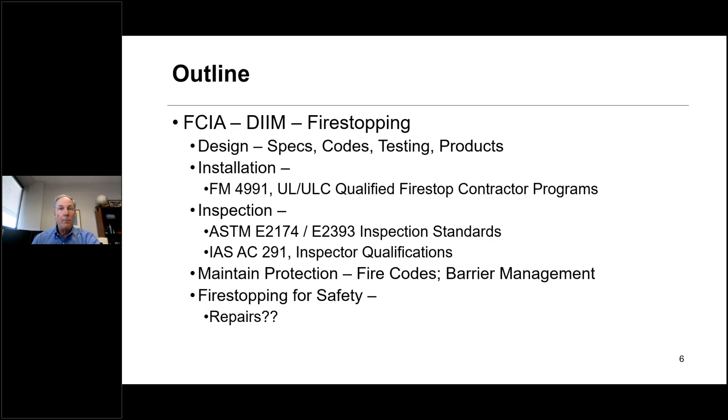A big deal. And then maintaining protection, which is what we're going to start with today. So the DIIM, it goes in a circle. I've had this circle slide for probably 15 to 18 years, and I think it's great. Why? Because it comes from the quality management process thinking.

Quality management process really evolved from a guy named W. Edwards Deming, a management consultant from just after World War II, who said to focus on the process rather than the people. If something's not being built right, don't go beat the people up. Check the process first to see if the process is set up so that the people can win. And if there are still problems with the people, train them to fix the problems that currently exist in that process. Deming is who came up with that program. And each one of these pieces, DII and then barrier management, has been customized to our industry.

Specifications, codes, standards, management system programs for contractors. The manufacturers have their own management systems, education, inspection in Chapter 17 of the International Building Code, NFPA 80, NFPA 1, barrier management. There's all kinds of things we've customized to make this quality management circle work.

So at the end of the day, the firestop materials that have been installed to the manufacturer's installation instructions and the listings work as called upon by fire.

So let's flip this program upside down a little bit, and I'm going to take us to the end of the program and work our way backwards, then come back forward and talk about the end of things.

End meaning when the building has already been built and it's constructed, the building codes have been followed, the ASTM E2174 inspection found the firestopping to be excellent. Then the building is turned over to the building owner and manager. And then what happens? Well, we all know what happens.

Changes are made above the ceilings where the fire barriers, smoke barriers, firewalls might exist, or even where the smoke partitions are when there's no ceiling in place that would allow the building owner to not continue the walls up to the ceiling assembly, floor ceiling assembly above. That means changes take place all the time.

How do we keep track of all the changes that take place in a building when really the building owner is focused on how's the carpet look, is the glass clean, is the lawn mowed, does the roof leak, does the parking lot have holes in it, does the sprinkler system work because the fire marshal's all over me, does the alarm system work because again the fire marshal that comes around yearly is going to ask me about it. What about the compartmentation?

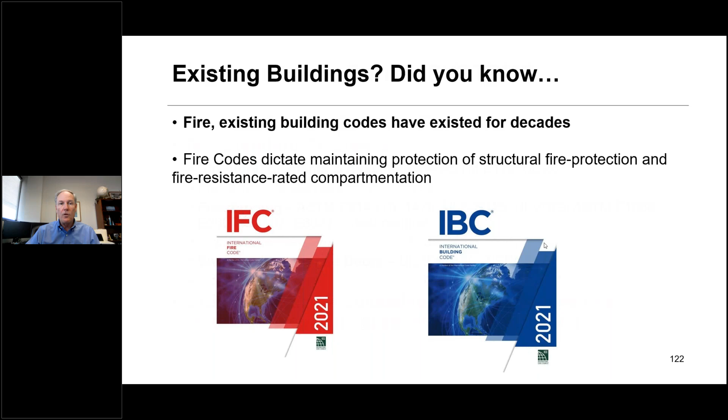We're just going to cover the testing a little bit. It's complex, and you need to talk to the building owner about how complex it might be. But just know, if you're a building owner or manager on this webinar, here's the requirements in the fire code that require maintaining protection. And it's in many, many places. I'm just going to focus on three: NFPA 101, NFPA 1, and the International Fire Code.

These are North American standards and codes, and you'll find them used in South America. You'll find them in Mexico. You'll find them in Canada. Certain provinces in Canada use NFPA 101. Certain states and areas in Mexico use pieces of the International Building Code, Fire Code, Energy Code, and NFPA 1 might be used in various places too.

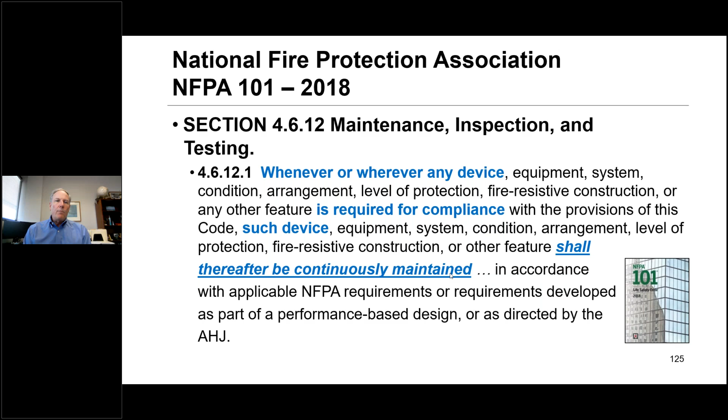Here's what it says in NFPA 101 about maintaining protection. It calls out right here: fire resistive construction continuously maintained. Why do I bring this up? Let me get through the rest of it. I'll tell you why after a bit.

Litigious societies exist. The US has plenty of lawyers, we graduate lots of them all the time. Canada is a little more selective, but you've got attorneys everywhere. And you've got liability, but more importantly, the way word travels today—bad news, that is—through the internet, through Twitter, through Facebook, through Instagram, through, pick any of them, TikTok, whatever.

The way things fly around the internet today, it takes a minute for bad news to travel. And we don't want bad news to travel about effective compartmentation. We want the good news to travel, that the silent policeman did its job and the fire didn't spread.

Moving on, look at NFPA 101, section 4.6.12.5, this is the general section. So the occupancy chapters would have to adopt this in order for it to be mandated as part of NFPA 101.

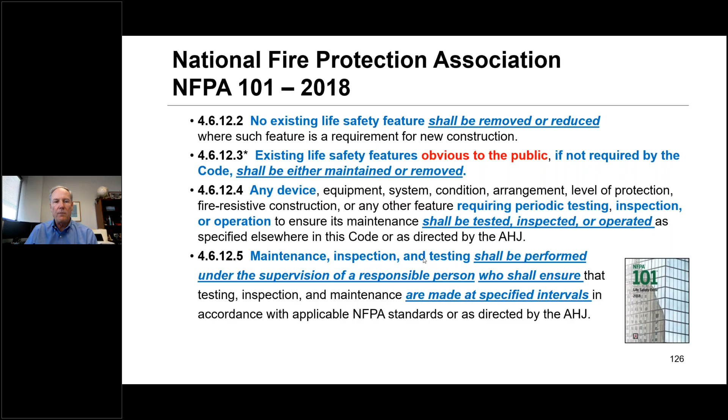But from a legal perspective and from the press perspective, if somebody has loss of life or loss of property, they're looking at what kind of regulations are there. It's very clear right here in the codes what the regulations are for maintaining protection of existing buildings with fire resistance in it. It even says that the person that looks at it has got to be responsible, ensures the testing, inspection, and maintenance takes place at certain intervals. And NFPA 1 comes out loudly and says fire resistant construction shall be maintained and properly repaired, restored, replaced where damaged, altered, breached, penetrated, removed, or improperly installed.

I spoke through it fast, but you're going to see it again because this comes up in one other document, the International Fire Code, almost the exact same language. This is really amazing stuff here.

From our perspective, we would like our membership, contractors, consultants, manufacturers, to show this to their building owner clients because it's a risk they might not know about. And that risk is pretty personal, because unlike a roof leak, which doesn't really kill people, fire spread and smoke spread could. That's why it's so important we look at this and think about how companies like yours as a firestop contractor, consultant, architectural design agency, or engineering firm can provide value to customers already using you for other things.

By focusing not just on firestopping, but on everything related to fire resistive requirements. That includes fire dampers, fire doors, fire stopping, the fire rated wall assembly, and take a look, even the roof assembly. Why is the roof covering mentioned?

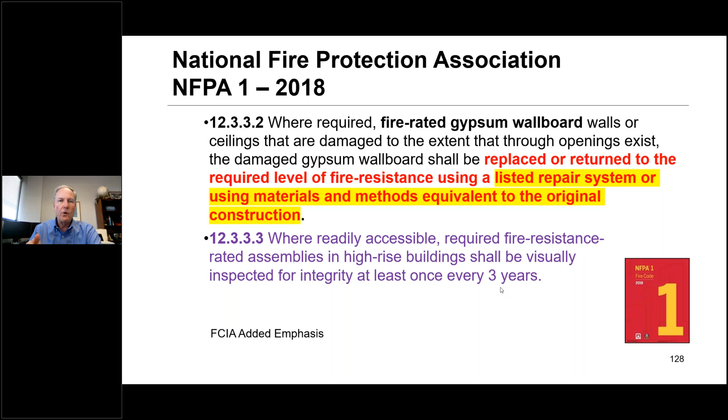So fire codes are pretty strong. They talk about how often, NFPA 1 says take a look at things every 3 years. So there's a trigger here that you, the professional, can bring to your building owner friend and say every 3 years you should be doing this. Whether they use their own personnel or a contractor isn't up to us, the FCIA. We just want to make sure it gets done so that the fire resistance is reliable and works when called upon by fire.

Look at NFPA 1 even more. It says that the person that's responsible—remember at NFPA 101 we saw a responsible person—this one says the responsible person's got to have technical knowledge and experience in fire resistance rated design and construction. How do you get it?

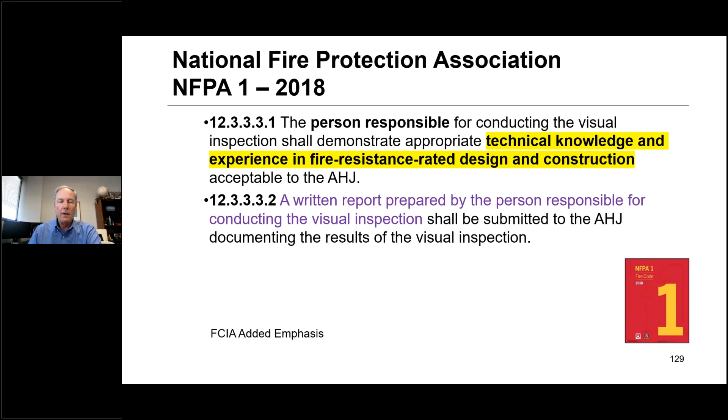The FCIA built the Barrier Management Symposiums. We built our Firestop Certificate of Achievement and education program, where you get a certificate for taking exams on firestopping just for this purpose. So you can prove that you're a responsible person because you've passed exams. The UL Firestop exam, the FM Firestop exam also can do that, as well as many other exams and education programs that might be out there too.

The International Fire Code screams just as loud. We're talking about the M, maintaining protection—the International Fire Code is about maintaining protection. That's the ICC family of codes. We just debated the 2024 version of that. The committee action hearings, final action hearings again in Pittsburgh sometime in October.

We've got some more discussions going on, not much going on right this moment. The big change came, and Rich was chair of the task group that helped make this possible: the International Fire Code is now broken into sections covering fire stopping, fire dampers, structural fire resistance, and fire rated glazing all in separate places, because each of them are separate disciplines. The NFPA codes don't do that yet. We'll have to see what happens with that as time evolves.

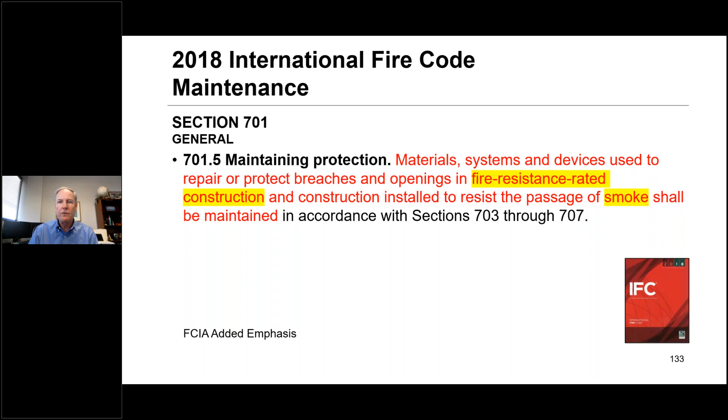So here's what the program looks like. It's 5 different areas to look at, and then of course smoke barriers, smoke partitions, maintaining protections is important. Take a look at this. Here's the language that was in NFPA 1.

Visually inspected by the owner, this time annually, and it's not just limited to high-rise assemblies or high-rise occupancies. That high-rise occupancy every 3 years is what you saw in NFPA 1. High-rise is defined as 75 feet above the lowest fire department access, 75-foot occupied floor, and for us, occupied roof above lowest fire department access. That occupied roof hopefully comes through for the 2024 code, not quite as clear as in the 2021 code.

So properly repaired, restored, replaced where damaged, altered, breached, or penetrated. If I were to look at this sentence though, it doesn't say that the repairs have to take place every year or every 3 years. It says that the repairs need to be handled as you go. In other words, as new services are run above ceilings, breaching smoke barriers or fire partitions, that protection needs to be maintained. Or if somebody punches a hole in a fire resistance rated assembly that's visible, that's got to be fixed and repaired with a patch that's fire resistance rated as well. All amazing types of things here that need to be taken care of.

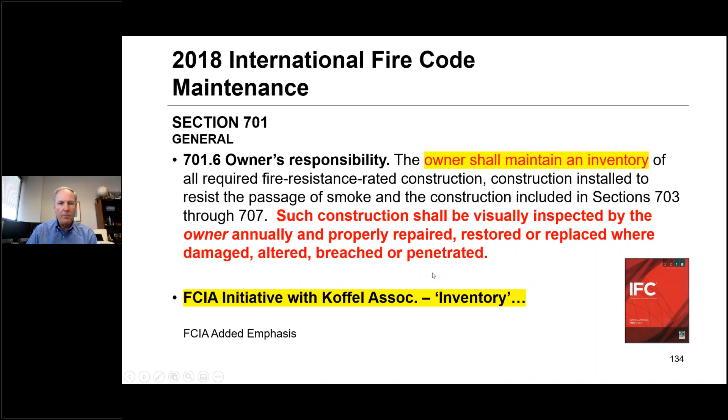It also says records shall be maintained so the building owner or manager can prove to the fire official they've done these things. And then there's one more term in here we want to talk about: the concept of an inventory of all required fire resistance rated and smoke resistant construction. What's an inventory that needs to get maintained? Well, unless we know what we have to maintain, what are these things? We don't know what to do and what kind of schedule to put them on.

You saw that there's an annual visual inspection in the International Fire Code. NFPA 1 has a 3-year review of the fire resistance rated assemblies, the construction, and the roofs. So what that does is trigger the building owner and manager in their procedures to have a review of these assemblies that matches up to what the requirement is in the fire code, so that when the fire marshal walks in and says, show me your records that tell me you did your 3-year inspection or your annual visual inspection, you've got that documentation.

The inventory would be, okay, Mr. and Miss Fire Marshal, we have either a software program on this laptop or on our tablet or on our phone, and here are the fire resistance rated doors from, pick a manufacturer. Here's the listing that goes with it. The glazing is found in the fire resistance rated assemblies. We pulled this from the UL Product IQ, and we've got it permanently on file. Why? Because things change. Manufacturers don't delist things, but they might not pay for the follow-up service and might not be listed in the directory anymore. So it's important the building owner and manager keep their own records of what they have so that they know they can prove to the fire official that these are fire resistance rated assemblies.

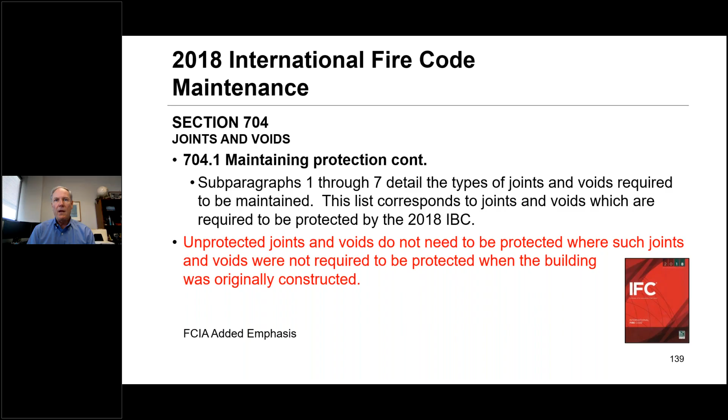That, along with the life safety drawings, gets you the inventory of fire resistance that we mentioned. That was something that was put into the 2018 version of the International Fire Code. It's in the 2021 version, and it's going to be in the 2024 version.

So if you're a contractor, educate your building owner and manager friends. If you have other divisions in waterproofing, insulation, or fireproofing, and you've got relationships with the building owner and manager, talk to them about what I just went through with you.

Use those slides, take them through to the FCIA website and you can click on the slides and see it. Or if you want to, just turn on the recording, because the members can get to the recordings, and just let this program present to them.

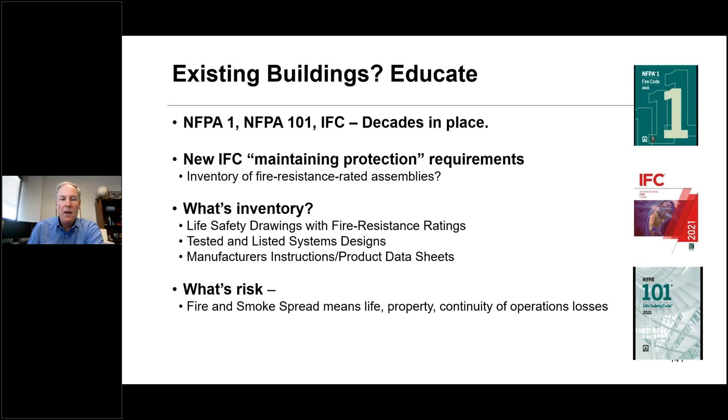Just know that the international fire codes out there, NFPA 1 and 101, all of them have been out for decades with maintaining protection required. That inventory has to be maintained, and we're trying to reduce the risk of fire spreading in buildings and increase the reliability of the installed systems, so that we wind up being the success story in the press that we stopped fire from spreading from place to place.

If you have experience with that and have seen where the fire stopping, the doors, the dampers have stopped fire, and you've got pictures, send them to us. We want to find a way to use our platforms from the FCIA to promote the effectiveness of effective compartmentation.

Certainly we might have to talk to legal people, have to talk to the building owner, make sure that we can use these stories. But the more stories we can get from you, the better we can promote that out to the industry. Where there's fire resistance used, it's used most in hospitals, nursing homes, and prisons.

That's where you find a lot of compartmentation - apartments, condominiums, universities, laboratories, warehousing, manufacturing. Those are the building types. So who do you call on to find these people?

Hospitals and universities tend to call that person the physical plant manager. They manage all of the physical plant. The healthcare facility director, ASHE member - American Society for Healthcare Engineering - and all the local chapters, they have a big job. They keep track of a lot of stuff, including equipment that moves through that hospital as well. They have responsibility for that. You imagine how much they got to keep track of with their staffs as well. A lot to do there.

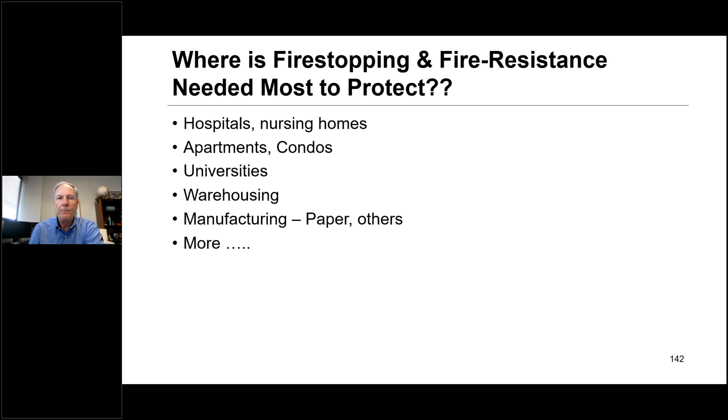So: life safety drawings, the tested and listed systems, the manufacturer's instructions - keep track of them, either paper, spreadsheet, or software. And think about becoming a barrier management services professional. The FCIA has a section, the barrier management services section, and that's where you get found. Those are the types of activities - inspecting fire doors.

NFPA 80 says do it every year - annual visual inspection of fire doors. Do they open, close, and latch? Is the hardware still there? Did somebody put screws where they shouldn't be? Is there too much paper plastered all over the door?

Fire-rated fire dampers - have they been tested? Is it now using remote testing? Somebody still has to flip the switch to make sure that the damper opens and closes as it's supposed to when it's activated. And then also the visual inspection of the wall and the horizontal assembly for breaches in those assemblies - that has to be done.

The building owner or manager has to do it either annually or every 3 years. Whatever it is, somebody's got to do it and somebody's got to track it. If you're not in that business yet, think about getting trained, getting educated, and getting into it. The FCIA has resources to help you with all of the above.

So let's go back to the beginning and get a few slides before we turn it over to our friend Rich Walke. This is where I was.

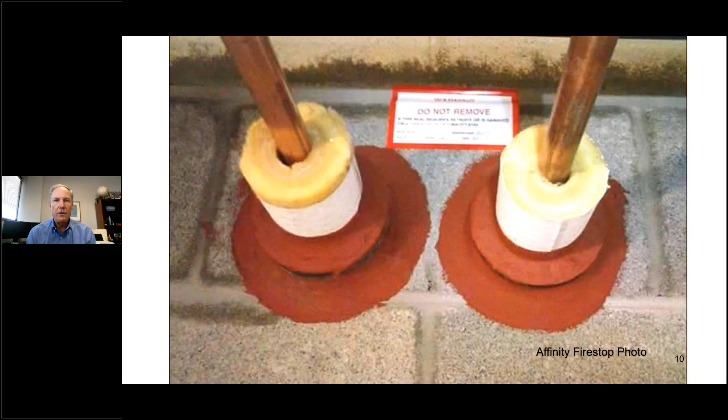And then Rich gave us this photo - or didn't give us this photo, but we took this photo. Rich and I have been using this for education, and we ask ourselves, which number is it? Is it CAJ 5138, 5209, or 5091?

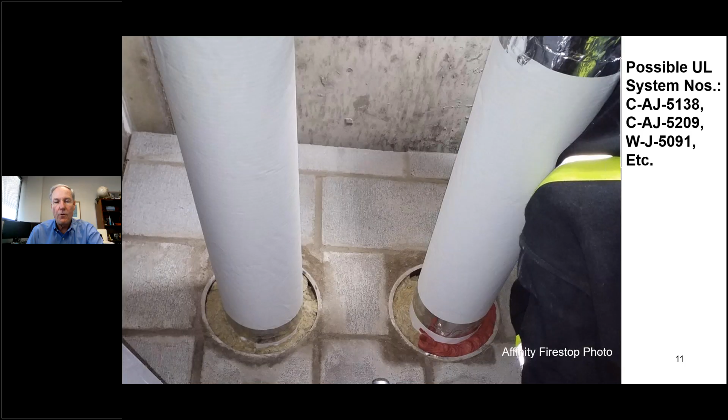Whatever it is, it's going to have requirements for the sleeves, for the depth and thickness of mineral wool, sometimes the direction and orientation of the mineral wool, the type of sleeve, type of insulation. All of that's going to be in the tested and listed system.

Before we get to the tested and listed system, Rich has to tell us about those tested and listed systems. I'll tell you that this is what gets put into the specifications. They talk about systems in part 1 of the specifications and the product properties of those products that are being used, that they match what the conditions are that are expected to occur in the field.

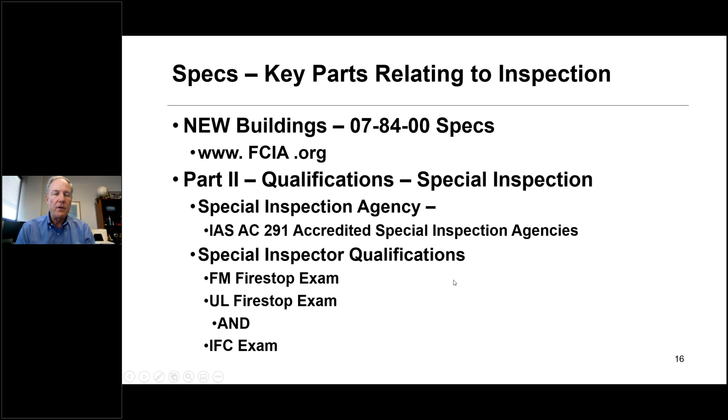Contractor requirements, I talked about those already. There's inspection requirements. The inspectors, we believe, should be educated and also pass the UL, the FM, and the IFC exam, because we believe those are important exams to pass. And then special inspection occurs.

When it comes to the life cycle of the building, Division 1 is hugely important. We did a program for the Construction Specifications Institute, CSI, and Construction Specifications Canada, and I can tell you the architects and specifiers had their note pens out, writing or typing notes when we brought this slide up.

In the audience when we presented this was Dennis Hall. Dennis Hall speaks at the FCIA conferences, and he'll speak at one of ours here soon. What he did was take the numbering system you see on the left, 6 digits, from 5 to 6, and he reorganized the master format. It was a big program. The book Who Moved My Cheese and all that kind of stuff took place during that same time. And our buddy Dennis moved everybody's cheese.

So I asked, hey man, what about this 01 78 39 project record documents? Is this where all the fire resistance has to be kept, so the general contractor has a direction from the specification to provide all the systems and manufacturer's installation instructions back to the building owner and manager? Is this where this all takes place? And he said, yep. This is where the direction comes to the general contractor to gather tested and listed systems, manufacturer's installation instructions, safety data sheets, put them in a packet, and hand them to the building owner and manager so they can maintain it.

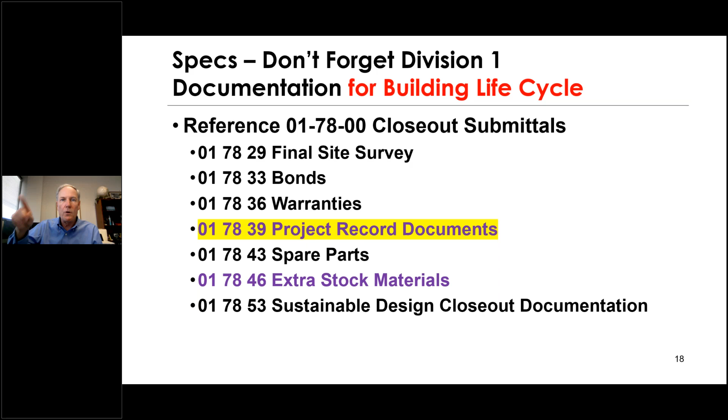So after those presentations, we got phone calls and emails from the people at Master Spec and other master specification programs to help them with that section. And guess what? It refers not just back to 07 84 00 fire stopping, it goes to fire dampers, fire doors, fire rated glazing, gypsum wallboard, concrete, and other places as well.

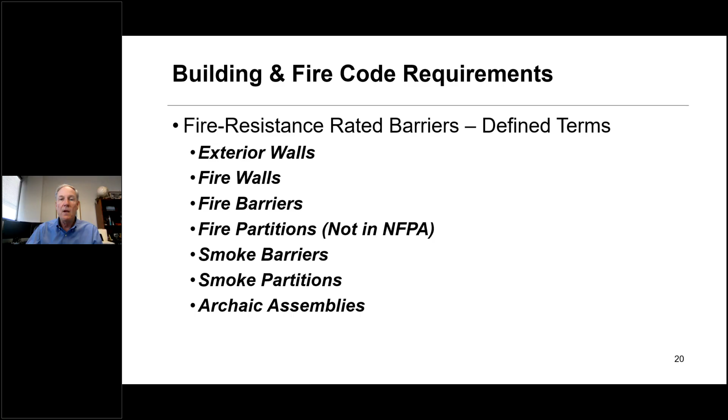A big deal. Building codes have requirements. There's terms for the fire rated assemblies. These are all tested to ASTM E119, UL 263. I'm not going to cover that today. If you want to hear about that, visit with us on one of our other webinars.

Also know that even old assemblies have fire resistance ratings. You can go find where there's not documented systems, go find what the hourly ratings are in the back of the International Building Code, up until about 2 cycles ago. Now you find it in the International Existing Building Code. HUD, Housing and Urban Development in the US, also has a document on archaic assemblies to figure out what the fire resistance rating is.

But that's not the contractor's job to do. That's the fire protection engineer and the design professional's job, to declare that the clay tile block, gypsum block, plaster, whatever it is, is 30 minutes, 60 minutes, 120 minutes, 240, whatever that is, as far as developing those fire ratings: tested and listed systems, calculated methods, prescriptive methods, and then of course using the resources in the books as well.

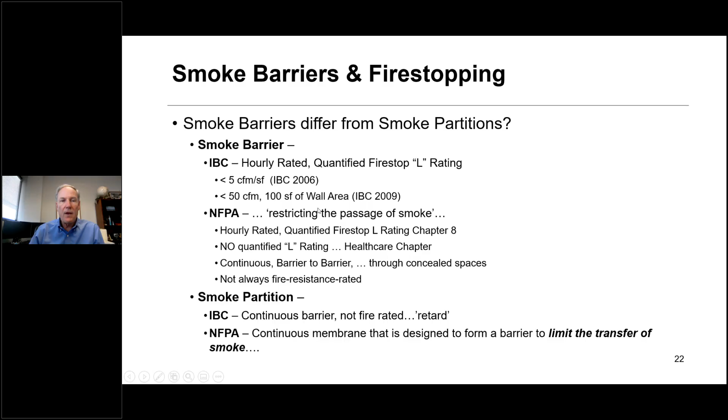Smoke barriers are critical. We've talked about L ratings. Rich and I have done a program on L ratings already to talk about the development of it, how it works. Go look on FCIA.org for the recording of that. It's well done and talks about L ratings in great detail.

So let's talk about testing. At this point, what I'm going to do is turn it over to Rich and let Rich drive the bus from here forward to cover the testing. You're like, Bill, we've covered testing before, and yes, we have. But every time you listen to this thing, you pick up something else, a new piece that you maybe hadn't caught the last time you listened to it.

Knowing the testing helps you explain to the building owner why the maintaining protection has to be done a certain way. You can't just use wallboard compound as glue for a patch inside a gypsum wallboard assembly, because the hose stream test will blow the patch right through the assembly.

It has to be a fire rated patch. The Gypsum Association's GA 225 document explains how that fire rated patch has to be built. Manufacturers of gypsum wallboard also have proprietary testing that gives other recipes for patching gypsum wallboard. So you need to know the testing and be able to explain it to convince the building owner and manager why your method makes good sense.

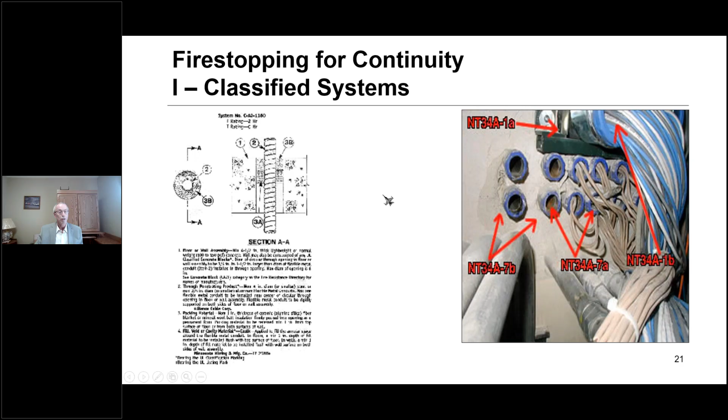We're going to talk about the installation concept of the DIIM philosophy, which relates to the installation of tested and listed, or classified, systems tested by some laboratory like UL, Intertek, or Factory Mutual. We'll talk about some of the standards and the testing processes described by those standards, and conclude with where those systems are published and what to do if we can't find a published system that meets our needs.

Let's talk about the testing for now. I always like to differentiate between the code definition of fire stopping versus the industry's definition of fire stopping, to set the stage for what we're discussing. By the code, the word fire stopping relates to the protection of penetrations. However, the industry has expanded the use of that phrase to include not only the protection of penetrations, but also protection of joint systems, perimeter fire containment systems, and continuity head of wall systems. So we've got a little different terminology.

There's a whole host of standards used to evaluate fire stopping by the broader definition of that term. We have UL 1479, ASTM E814, and FM 4990, which cover the testing of fire stop systems. We have UL 2079 and ASTM E1966, which cover the testing of joint systems. And then ASTM E2837, which covers continuity head of wall joint systems.

Good news, as Bill mentioned earlier, is that we were successful in getting that referenced in the 2024 International Building Code. So when we get to that point, we'll see that is now an option for protecting that void at the top of a fire barrier beneath a non-fire resistance rated roof assembly.

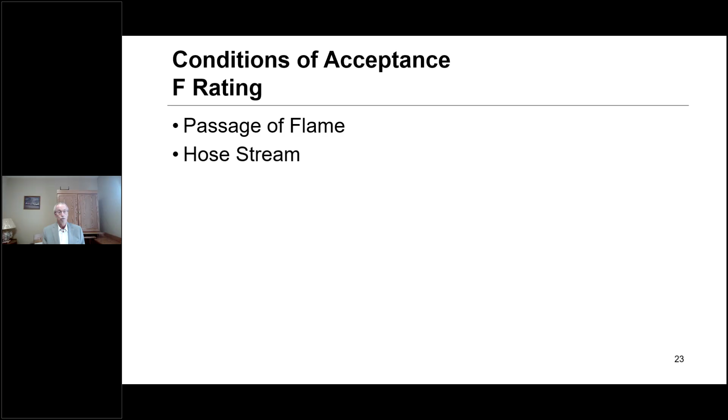All systems are assigned an F rating. All systems are also assigned a T rating, and the T rating criteria includes the same two criteria of an F rating, passage of flame and successful hose stream performance, but it also adds a third component. That third component relates to a limitation on the temperature rise on the unexposed side of the assembly. That temperature limitation is a 325 Fahrenheit temperature rise. So really what we're trying to do is measure whether the system will keep the temperatures low enough that we won't be concerned about ignition of combustibles on the unexposed side during a fire exposure.

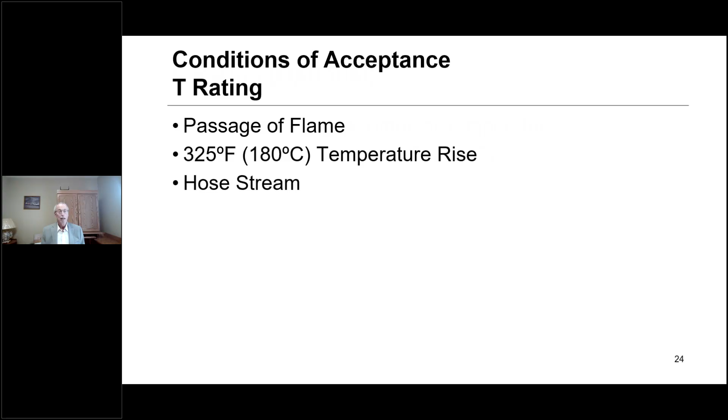The third rating is the L rating, and that is an optional rating. It was added to UL 1479 around 1992, and it relates to the leakage rate through the Firestop system at both an ambient temperature and at a temperature of 400 degrees Fahrenheit. So it represents leakage of cold smoke and hot smoke. And the test is administered through leakage of air through the system, but in reality, this test really relates to smoke leakage through the system in an actual building application.

The fourth rating is a W rating, and this again is an optional rating. It was developed in 2005, and it relates to the ability of the Firestop system to prevent passage of water through the system. And the concept here is we're referring to incidental water exposure. What happens if we have an inadvertent sprinkler activation or perhaps a plumbing leak, a roof leak? Regardless of where the water comes from, we now have water on the Firestop system. Will the application of that water penetrate through the Firestop system to the floors below?

That test is administered through the application of a 3-foot water column onto the Firestop system for a time period of 72 hours. During that 72-hour time period, there can be no leakage of water through the system whatsoever. But in my opinion, even more important than will that system prevent leakage of water is, will that system continue to perform its fire function after exposure to water? If we do have that plumbing leak, the system is exposed to water, and ultimately dried up. Will it continue to provide its fire performance as a result or after exposure to the water? To me, that's the bigger issue.

The last of the current ratings would be the M rating, or movement rating, of a Firestop system. Really what that relates to is the ability of the Firestop system to accommodate movement of the penetrating item relative to the barrier in which it's passing through. In terms of the testing, the penetrating item is moved perpendicular and/or in the plane of the barrier in accordance with a test procedure outlined in ASTM E3037. After that movement, the system is subjected to the fire and hose stream tests where the F and T ratings are established. Again, it's kind of a fitness for use test. Will the system maintain its F and T rating in spite of the fact of being moved during the life of the building? Systems that have been subjected to that optional M rating are assigned an M rating.

The published rating will reference the percentage of movement relative to the annular space within the plane of the barrier, or it will specify the movement capabilities perpendicular to the plane of the barrier, based on some dimension, plus or minus a half inch, for example.

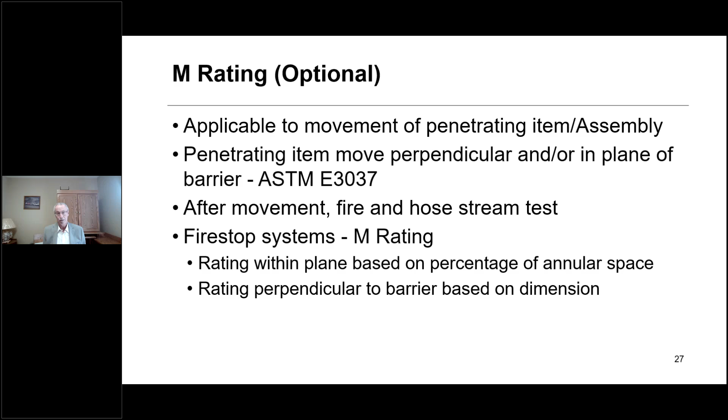This slide exemplifies or shows what we're really referring to when I say within the plane of the barrier or perpendicular to the barrier. The dimension identified by the letter Y relates to movement within the plane of the barrier, and the dimension Z relates to the movement of the penetrating item perpendicular to that barrier. So each system with an M rating will specify the movement capabilities in those two dimensions.

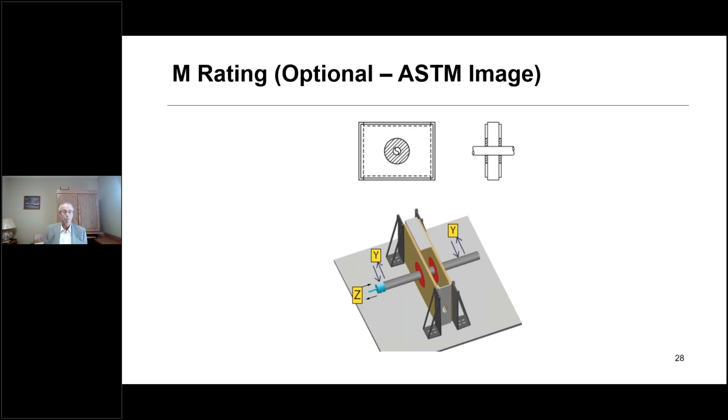After that construction and instrumentation, the assembly is placed on top of the furnace and subjected to a standard time temperature fire exposure from the underside of the assembly. The temperature of that fire exposure reaches 1,000 degrees Fahrenheit in 5 minutes, 1,700 degrees Fahrenheit in 1 hour, and 2,000 degrees Fahrenheit after a 4-hour time period.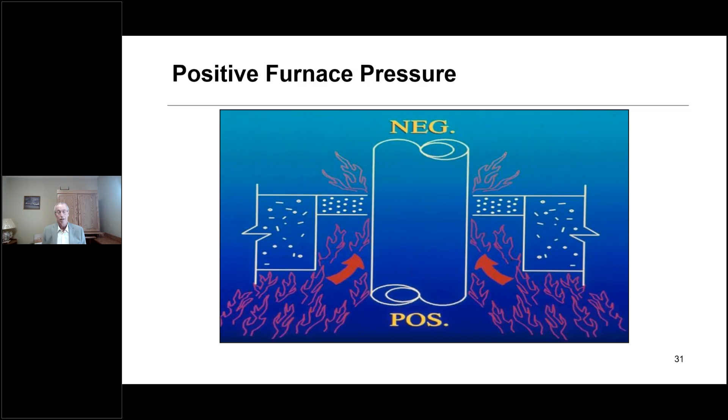During the fire exposure test, the laboratory is looking for whether there is any through passage of fire from the fire side to the unexposed side of the assembly. The laboratory is also recording the temperatures on the unexposed side for compliance with the T rating requirements of the standard. After the completion of the rating period, which is normally assigned by the manufacturer ahead of time based on their expectations of how the assembly will perform.

After that rating period, the assembly is pulled off the furnace and then subjected to a hose stream test. The idea of the hose stream test is, again, a structural integrity test to measure whether that system has sufficient structural integrity to stay in place during a very dynamic fire event. It's administered by a water hose stream, hence the name hose stream test.

The idea is we subject the sample to a 30 psi pressure hose stream for a typical 1 through 3 hour rating period, or a 45 psi hose stream for a 4-hour rating period. On the fire side of the assembly, we use slow, easy horizontal and vertical motions to impact the assembly. The concept is that the Firestop system needs to prevent any through projection of water during that hose stream test.

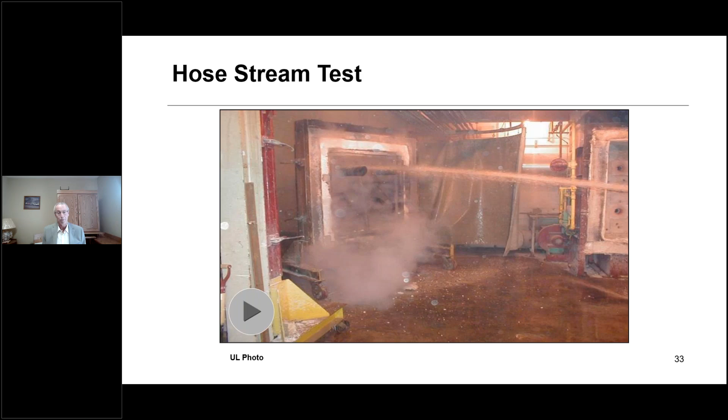So that's the currently published ratings established for Firestop systems, but certainly Firestop systems can be used for other purposes than just fire, temperature, leakage, water, or movement. There are other ratings being talked about by the industry that will someday probably become part of the standard—things like chemical hazards moving through the system, biological hazards, radiation, germ passage, or explosion resistance. All of those are future ratings that could be established and aren't yet there, but some manufacturers do have information on the performance of their systems under those conditions.

So if you have a need for that, check with the manufacturer, see if they've got anything that will help you out. And we'll all keep pushing to ultimately establish additional rating criteria for these hazards.

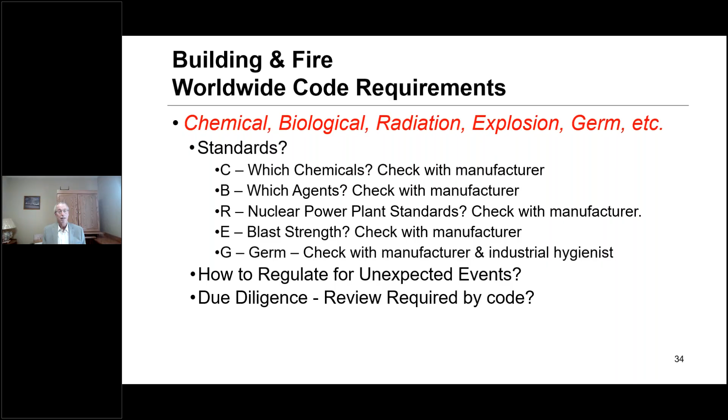And if you go back in time, that was one of the issues with the First Interstate Bank fire that occurred, I believe, in 1988, followed shortly thereafter by the One Meridian Plaza fire in Philadelphia.

Likewise, that was one of the issues - that void was unprotected. So we've learned from those fires. We now have ASTM E2307, which does evaluate the ability of the system to prevent that interior spread of fire.

Through that safing slot. Along the same lines, there is a second concern with the exterior curtain wall, and that would be something referred to as leapfrogging. Leapfrogging is where the windows on the fire floor break out, allowing a flame plume to pass through those windows and potentially ignite the exterior curtain wall if it's combustible, or at least project past the spandrel section of that curtain wall, breaking out the vision glass above, igniting the window treatments, and ultimately breaching the concept of fire-rated construction by allowing flame passage to the floor above.

So there's a new standard that Tony Crimi spearheaded, published a couple years ago, ASTM E2874, which looks at whether the curtain wall will resist that concept of leapfrogging. So Tony tried to get that into the 2024 International Building Code. Unfortunately, that proposal was disapproved, but we will all keep trying, and hopefully at some point in the future we can upgrade the code to include criteria relating to leapfrogging also.

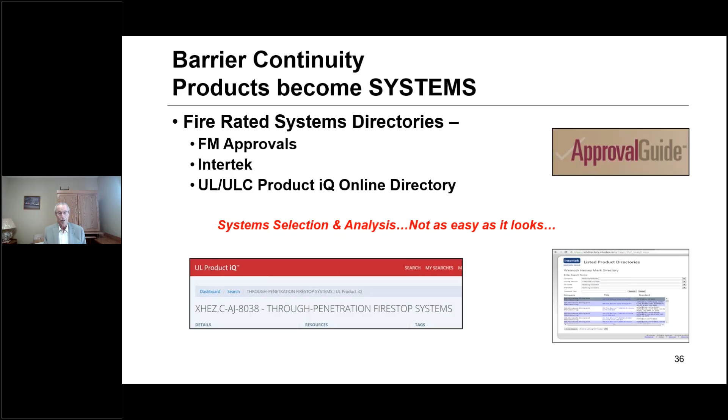So the next item I want to talk about are what's referred to as engineering judgments or equivalent fire resistance rated assemblies. Now, what are these? Well, really, they relate to situations where there is some unique field condition that exists where there are no tested listed systems available from any of the labs through any of the manufacturers.

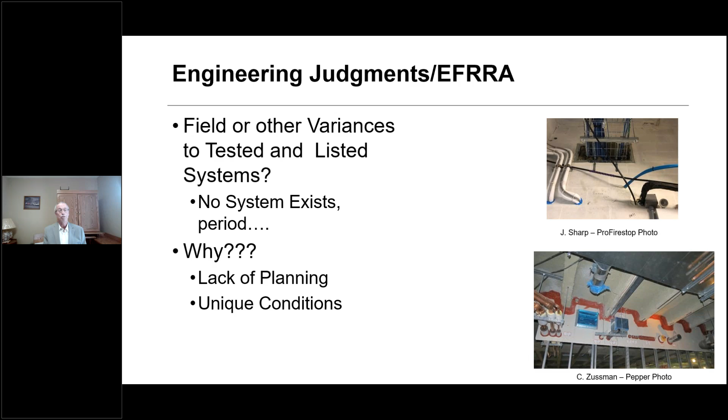Now, what do you do? Those conditions could result in some very unique construction condition, which certainly is common out in the field, or unfortunately, sometimes a lack of planning on the part of usually some other trade, and they ultimately leave the firestopping contractor pulling his hair out in terms of how do we protect this unique situation that shouldn't have developed in the first place. But anyway, we address those through engineering judgments or equivalent fire resistance rated assemblies.

And when we get to this situation where we've identified a need for an engineering judgment, what should we be doing? Well, it's a process. The first thing should be to look for another system. Hopefully the same firestop material manufacturer will have another system that covers the unique field application. If so, simply use that system. You're done, you're all good to go.

If the original manufacturer doesn't have a system, perhaps look for a system from some other manufacturer - again, a tested listed system just with different firestopping materials. If we can find one, again you're good to go, use that system. If not, now you're into that realm of an engineering judgment or equivalent fire resistance rated assembly.

And those two terms really, I consider them more or less equivalent. Most of the industry uses the phrase engineering judgment. Factory Mutual prefers the phrase equivalent fire resistance rated assembly. But bottom line is, when you do need to get an engineering judgment or an equivalent fire resistance rated assembly, you do that through the use of engineering, through the use of tested data on systems that are similar to what you're looking to install.

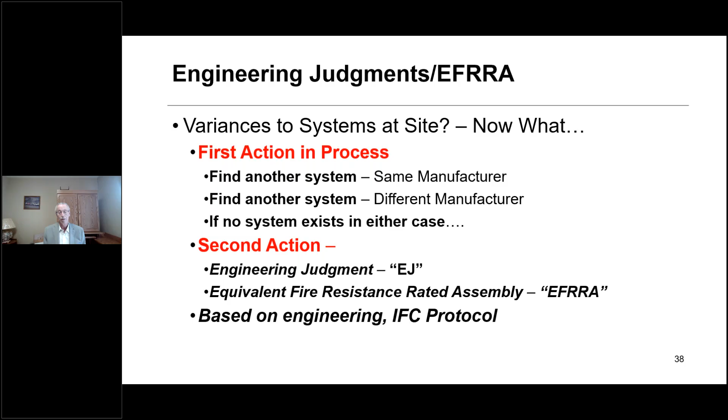The International Firestop Council does have a protocol on how to use engineering judgments. It's a very well-written document that gives good guidance for everyone involved, everyone from the code official to the contractor to the architect, in terms of how you do these engineering judgments. And again, it's based on science, it's based on engineering - it's not gut feel, 'I think this is going to work.' It is science-based.

So some of the highlights of the IFC engineering judgment guidelines would suggest that an engineering judgment is not a substitute for existing designs - if there is an existing design, use it first. It emphasizes the importance of tested designs: a tested design is always the starting point of an engineering judgment, and then you evaluate what modifications exist from that tested design to the unique field condition. The guidelines also suggest that the judgment should be issued only by those who know the performance of the components, which would be, I suppose, four parties that could be doing that.

We could have a PE, an FPE, a testing laboratory, or the manufacturer issuing those judgments. My personal opinion would be the best home for those engineering judgments is really the manufacturer, who knows the performance of their products better than others. Typically, the folks doing the judgments are the same folks who are setting up and witnessing the fire testing at UL or at their own facility, so they have a real good handle on the performance of those materials. Testing laboratories also do a great job, or others, folks like myself who have years and years of experience of testing. We know how those systems perform and can do a valid judgment.

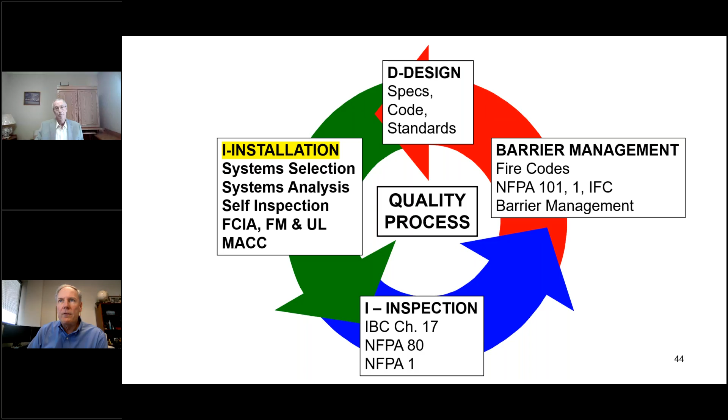Thanks, Rich, for taking some time to talk about engineering judgments, test standards. All are important, because why? The test standards, whether it's in the UL directory or in the FM approval guide, which you find over here under building materials, and then we go over to wall and floor penetration firestops. Regardless of what it is, this is where you find the suitability for use statement of the products in the specific application, with all the limitations that might come with it.

What's the annular space size? How many cables can go through here? How many pipes can go through here? This is what determines what a firestop system actually is, whether it's at the FM approval guide, Intertek guide, or at the UL Product iQ.

Whether it's continuity head-of-wall systems, go through the assemblies here: fire doors and fire windows, the roofs, the walls, the floors, the beams, the columns, grease duct assemblies, exterior wall assemblies, electrical circuit integrity systems, firestop systems, of course, which would be for penetrating items, penetrations and such, all with the numbering system that we're all familiar with. We'll cover that in greater detail at future FCIA webinars.

Today's program is not to do system selection. We do that in another webinar, but it's really to give an appreciation for what constitutes a firestop system.

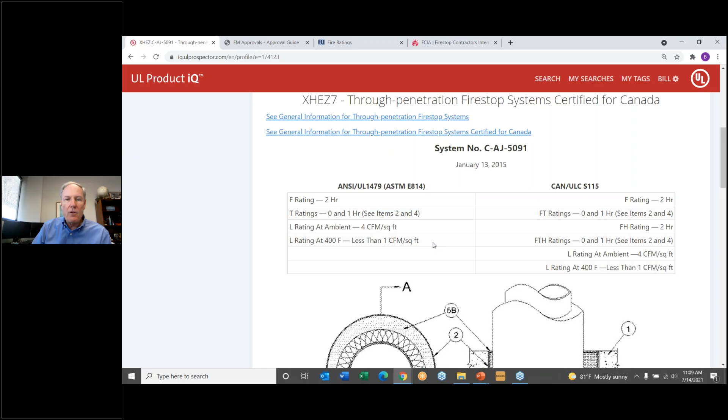I'll just take a second. We'll try to get to a system. I think we had C-AJ-5091, I think the number was, that we had shown earlier. And it's going to show, doesn't matter the manufacturer, Specified Technologies, Hilti, 3M, Rector Seal. All of them are great manufacturers, and all of them have their own unique firestop systems.

It might look like this. They might not look like this. Just know that they all compete with each other, so they're going to have systems that are similar, but they'll all have some kind of a difference to them. The materials can't be swapped one for the other. Once you have a CAJ 5091, you're locked into using whoever the manufacturer was.

In this case, it was a Hilti Firestop sealant in this particular application. Key things like understanding whether or not the sleeve can be flush with the floor or extend a maximum of 3 inches above the floor.

When Rich was talking about engineering judgments, maybe the contractor installed a system that looked just like this, but installed the Firestop product at the top of the sleeve. So the question would be, where does the Firestop sealant get installed? That's all down here, flush with the top surface of the floor or both surfaces of the wall. So guess what? If somebody installed that Firestop sealant at the top of that sleeve, we got a problem. And the problem is the system shows it at the flush with the wall or the floor, not at the top of the sleeve. You're like, really, Bill?

Is the Firestopping that picky? Yes, it is. Now, mind you, Hilti or one of the other manufacturers probably have another system that shows the sealant at the top of the sleeve, but for this particular system, it doesn't show that, so it wouldn't be able to use it. That concept flows throughout our Firestop industry, whether it's joints, perimeter fire containment.

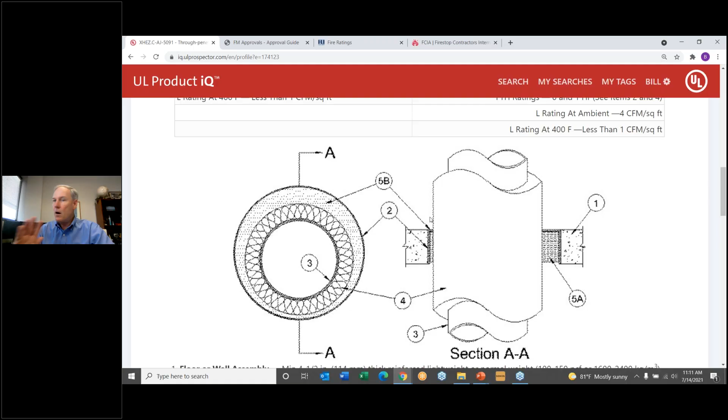All of these assemblies are very specific in the construction that's assembled here. The sleeve has to be as in the field as it's shown in the lab design. The thickness of insulation, the type of insulation, the type of penetrating item, the annular space size, whether that annular space can be zero point contact or huge, all of it's stated. And then the ratings, F, T, L, and of course, if it had a W rating, it'd say a W on it as well. L meaning air leakage, simulating smoke movement through that assembly.

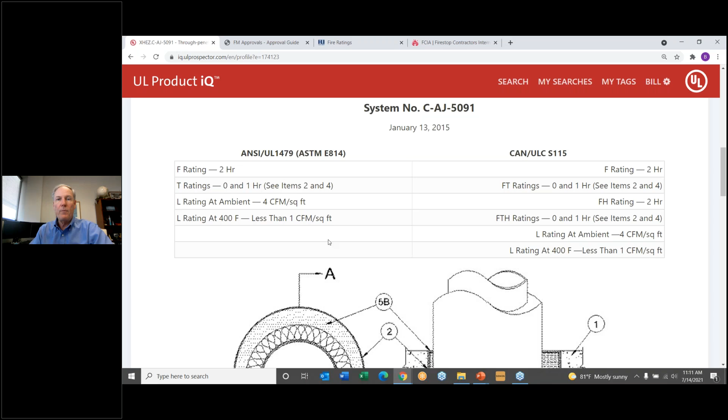So key things to know: systems first. If there's no system from any manufacturer at any of the laboratories, let's say Hilti didn't have, just for grins, they probably do have it, but if they didn't have a system that fit the condition in the field, then the 3M system or the STI system, if they had it, should be used.

How does that work with submittals and such? The litigious society we live in doesn't care about submittals. It cares about safety. And if a tested, proven system is available, it wants a tested, proven system first. So just remember that when you start thinking about engineering judgments and the why and the how, et cetera. Directories are open, public, and free, so use them.

Again, system selection, analytical analysis of Firestop systems. Contractor selects. The analytical part of it is done by the Special Inspection Agency or the AHJ, the Authority Having Jurisdiction Code Official. In Chapter 1 of the Building Code, it says the code official is supposed to say that the walls aren't to be closed up before the code official gets a chance to see what's going on with the Firestop systems.

And that's another education that constantly takes place, whether it's the FCIA or the manufacturers who are talking to the code officials about what is an acceptable Firestop system. In other words, does the system match what's in the listing that's being shown right now, and has it been installed to the manufacturer's installation instructions?

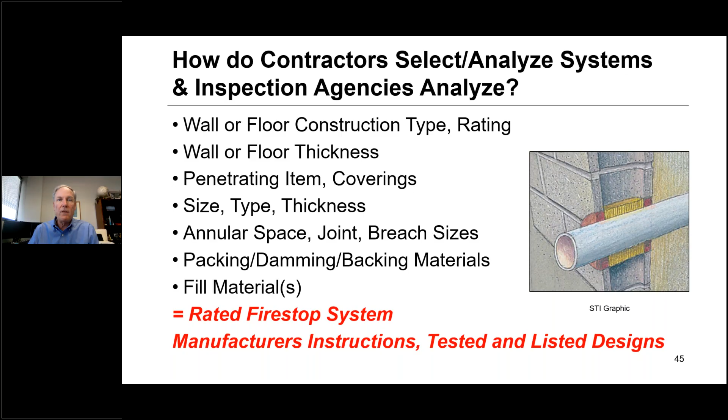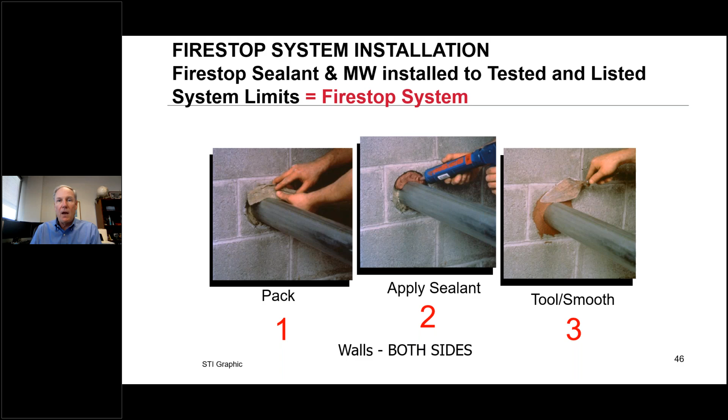Let's get moving. We haven't seen it shown installation of Firestop. It's a really old slide, but you know what? It's very good at showing the action of Firestopping. The Firestopping is an action. It's a verb. It's not a noun, because it doesn't become a system until the action takes place. It's not just a product being put in the head of wall, in the fluted decks, around the penetrating items. It's not that.

Also know that fire dampers are tested to something else, UL 555, 555S. We've got another webinar coming on fire dampers, so you can learn about it from the people that know fire dampers. But just know that fire stopping is used around it. It's got to be part of the system, tested to the UL 555 or the 555S for smoke.

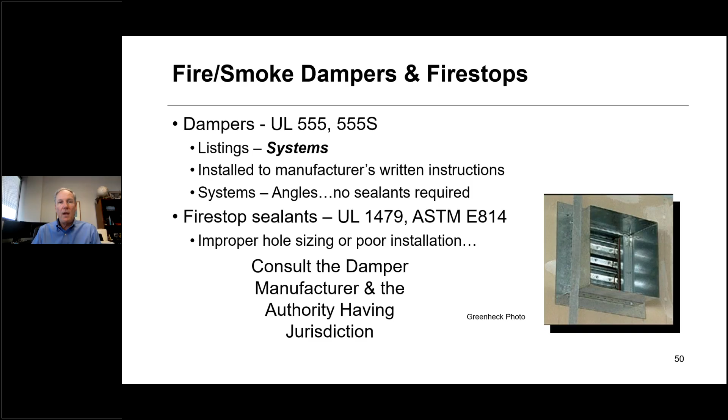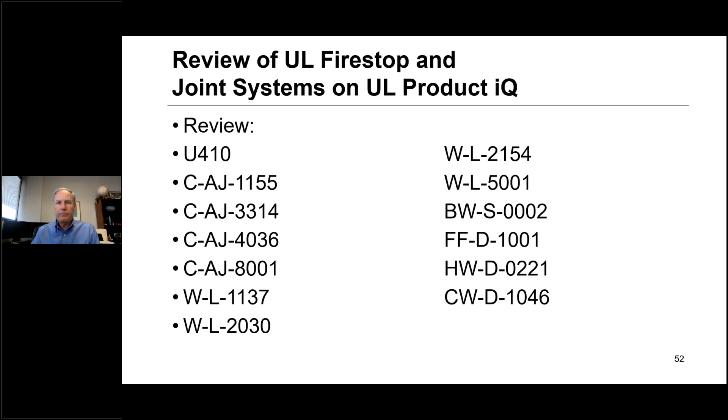The authority having jurisdiction and the manufacturer of the damper should be saying yes or no whether that can be used. Know that there's tons of Firestop products in the marketplace. Read the manual of practice, that's where you'll learn about them. There's tons of systems, but what has to happen is that the materials, the systems, the installation instructions, the life safety drawings all need to wind up in this person's hands with the proper tools, safety equipment, PPE.

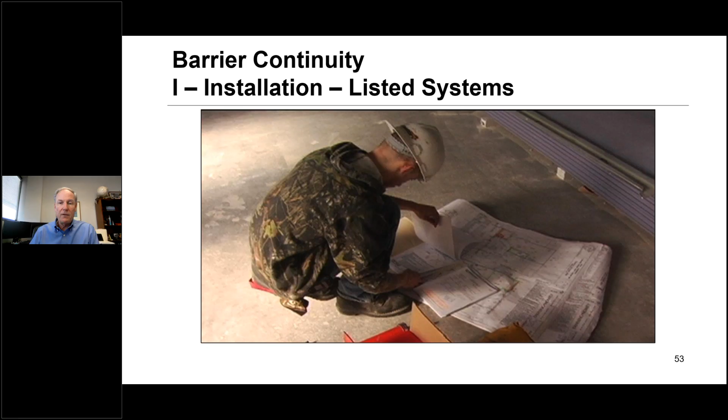In order to get this stuff installed properly. Then after they're all installed, it has to be invoiced to the general contractor and of course the money collected. So there's a lot of cycling, a lot of things that have to happen before we can call something a Firestop system. How's it installed?

Who installs this stuff, meaning the technical term for fire stopping? Three ways: each trade, he or she who pokes a hole fills it, or there's a specialist contractor, or a combination thereof. We think that the FM 4991, UL qualified, ULC qualified, FCIA member is best qualified to do that kind of work. What happens when it's wrong?

You get a circus. That's what you get when you see the people on the right. You know, you'd think that after 40 years of education about this industry that we'd have it right by now. But because the products are marketed to anybody without restriction, guess what? It can get in the hands of the wrong people.

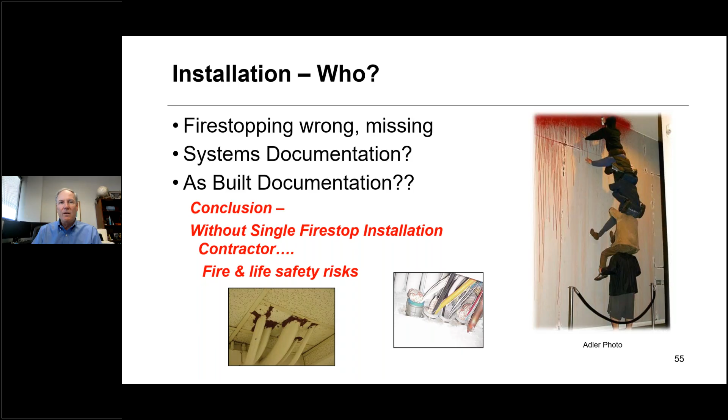And we think that's not a good thing. Without a good Firestop contractor that understands what's going on, an inspection agency, a qualified Firestop contractor, approved Firestop contractor, a good manufacturer that believes in testing their products to what can be expected in the field, it's a mess and has been for a lot of years. Just know that this is an important part of fire resistance.

So important that we worked with some not so small companies to build contractor qualification programs to qualify the companies that install this product to become a Firestop system. FM approvals, UL - I mean UL is a $2 billion organization. FM, they're right with them, huge insurance company, multi-billion-dollar organizations. And they felt it was important to have these two programs for our industry, for fire and life safety.

How are the other industries coming? I can tell you the fireproofing industry has jumped into it. They have a qualified SFRM contractor program now. The dampers, the doors, rolling doors, swinging fire doors, the walls themselves, it's changing, but it's going to take a while for us to get there.

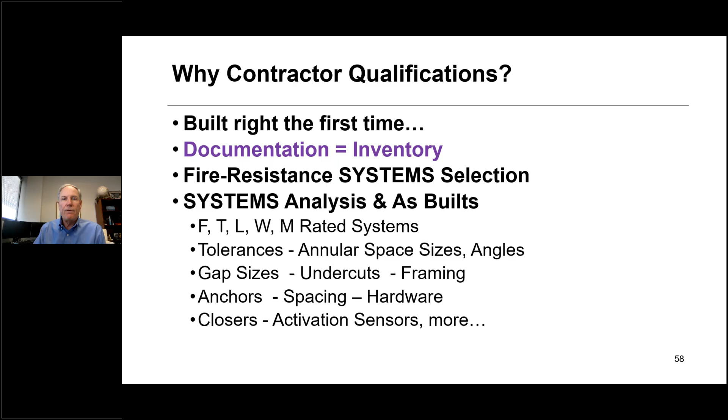Why contractor qualification so they get it right the first time. That inventory's got to be built. The building owner has got to know that they've got something that's not improperly installed, which is what's in NFPA 1, because they're responsible. Having an FM and a UL contractor helps know that product was installed properly to the tested and listed system.

How do they get there? Pass the Firestop exam, UL or FM, for each program, write a management system, have an audit by the FM or UL people at the contractor's office and then also at the job site to make sure that the process works. Appoint a company or a person at the company as a DRI and then get listed at FM approvals, UL, and FCIA.org. What's in this management system?

It's really the process that the company uses to get everything done - I'm talking about fire stopping - done in accordance with the tested and listed systems and the manufacturer's instructions, using safety data sheets and all the safety equipment that's needed to install this properly.

But if you look at this outline, this is not much different than what the manufacturers go through for their ISO 9000. It's not much different than you would see from the healthcare facility engineer when the Joint Commission comes through for their audits as well. They talk about everything: the facility, the safety, the construction documents.

How do you review them before you send the workforce and the materials out to the project site? How do you select systems, analyze them? How do you handle the materials to make sure that they are handled in accordance with the manufacturer's instructions? What about the installation and applications? What about testing and calibrating your tape measures to make sure you measure the annular space so it's just right?

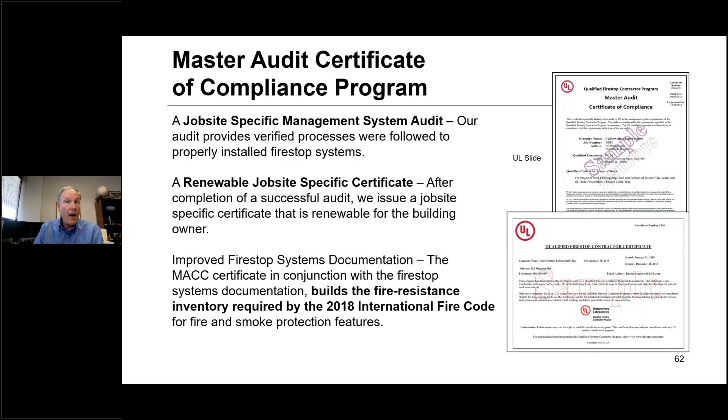What about this master certificate of compliance that's in the specification, been required to provide the building owner and manager with a certificate that renews annually and requires somebody to come look at the barriers so that there's an automatic annual visual inspection that conforms to the International Fire Code's annual visual inspection.

What about inspection itself, though, for new construction?

The backstory for these two standards is that the FCIA founding board actually thought about how do we separate the contractors from those that have no idea what they're doing? How do we get third-party inspection into the building codes? How do we build a body of knowledge, which became the Firestop Manual of Practice? How do we find ways to have a place where education can take place that's very specific to fire stopping at a very high level? That's what FCIA does, and the ASTM standards are a result of it.

Take a look at these pictures that just flew up on the stage. Thank you to Adler Firestopping for providing them. Look, somebody has cut a triangle in that Firestop material, and look where the measurement's taking place.

Currently, that's not what the International Firestop Council, the Manufacturers Association, says when inspecting fire stopping. The manufacturers say that the Firestop system sealant thickness measurement shall take place where the bond line is, in other words, where the sealant touches the concrete, and in this case also touches the metal penetrating item. Why? Because all sealants will shrink some.

Latex sealants will shrink somewhere up to 22% of their original state, meaning if that material is put in flush in a block like is shown on the UL or FM design, there's going to wind up being a shrinkage in the middle in a concave shape, meaning that if you measure in the middle, you're going to come up short of the thickness that was specified in the system, and then possible rejection to the contractor, which is an incorrect judgment according to the International Firestop Council.

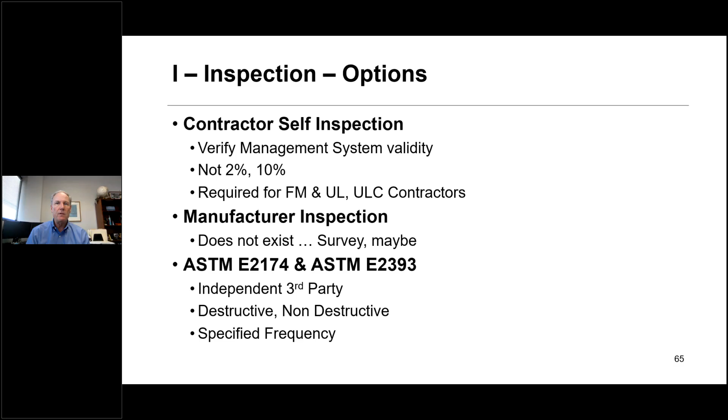When it doesn't get bought, what kind of inspection takes place? Then it's a free-for-all, basically. Can the contractor do their own? Sure. And could the general contractor rely on the contractor's statement? They could. What about manufacturers? We find that they don't inspect. They might come survey, look around, state that it seems to meet the system and criteria, but they really push it to the third-party independent inspection agencies to do that kind of work.

Is it in other scopes of work? Not currently, unless, of course, Chapter 17 of the Building Code is actually quite broad. The building code official could say to the specifier, to the design professional, I want special inspection for

all fire resistance, period. For instance, fire dampers state that there be commissioning done, such that there's commissioning at the start, when the building is commissioned to start with, 1 year afterwards, and then it's tested every 4 years in everything but hospitals. Hospitals are 6 years, so a little different thing there.

But that's part of NFPA 80. Fire doors are only inspected annually to make sure they close and latch, no bolts are missing, et cetera. You find that also, the directions and how you do that, in NFPA 80, rolling doors as well.

Fire rated glazing, what's to inspect there? The big thing is making sure it was installed in accordance with the system in the first place, then it just stays there. People don't typically put holes through glass to put piping and all that kind of thing.

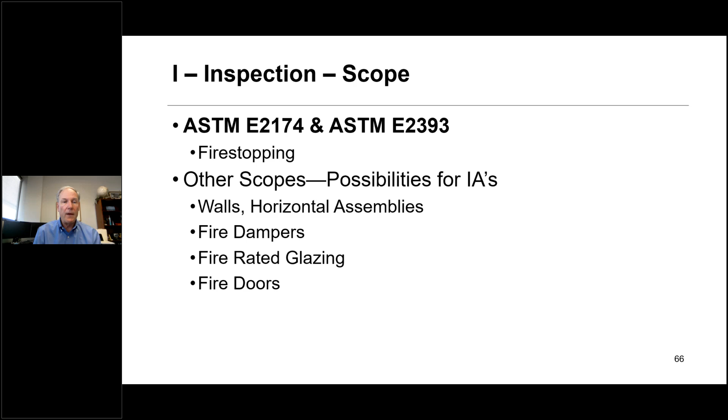So ASTM E2174/2393 we talked about, required by the International Building Code from 2012 onward. I talked about the types of buildings that are required in it. Know that Chapter 17 has 2 approvals: for the inspection agency and the inspector.

That's something that really I don't think gets enforced much. I get that most of the jurisdictions have a procedure for approving the inspectors, but I'm not sure what the procedure is for approving the inspection agencies.

Here's what the language says in the definitions. For an approved agency, it's an established and recognized agency, a company, regularly engaged in conducting tests or furnishing inspection services acceptable to the AHJ.

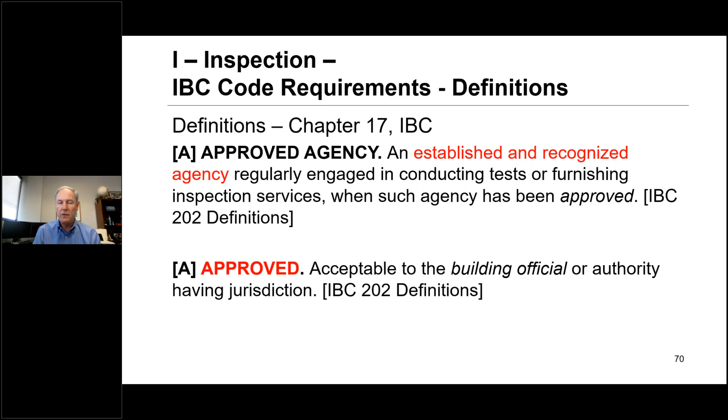That inspector is employed or retained by the agency. The retained means they can be an independent contractor of some kind, but the agency's got to be a company of some kind. Here's the category 3 and 4.

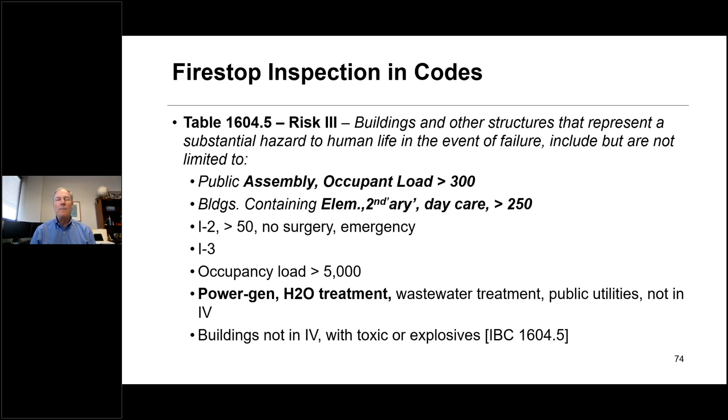Know that it's required for the category risk 3 and 4 type buildings. Take a look at the types of buildings that get special inspection. It's pretty wide: elementary school greater than 250, and now we've also got residential greater than 250 that's in the International Building Code 2021 version.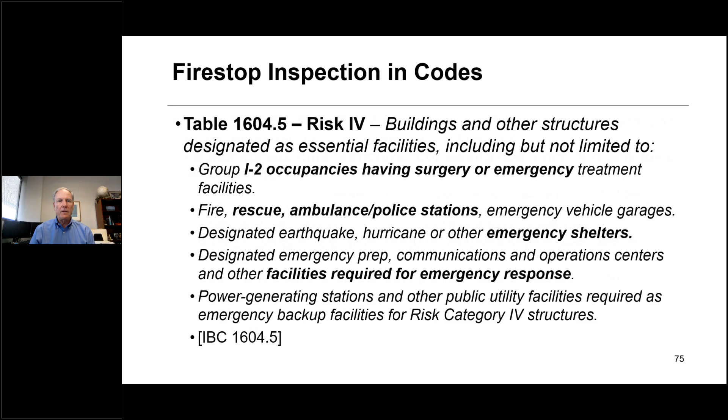The FCIA was the code proponent to put that in because we felt that it was needed for multifamily occupancies. We think that's going to be a big deal when the 2021 code is adopted in many jurisdictions around the country. Other types of buildings are in that risk category 3 and 4 as well. I won't go into the details in that.

ASTM E2174/2393 says it's independent inspection. The inspector and inspection agency can't be competitors of the contractor, the manufacturer, or the supplier. It can't be the distributor, the manufacturer. That's why the manufacturer shy against it.

IAS AC 291 is the accreditation criteria for companies that do inspections. It's really a good program. It's not used as much as I'd like to see it in firestopping, but I do believe it's growing. It's going to take time for it to take off, just like it took other programs to take off as well.

And in some of this, Section 6 of ASTM E2174/2393 is going to be changing over the next few years. They're not changed yet, but look for some changes to come in that as well.

So the inspector, in our opinion, should pass the UL or the FM Firestop exam and the IFC exam, International Firestop Council. Those are all 3 great exams.

So I'm going to quickly wrap up with some pretty rotten slides. This is something that a friend of ours, Rob Halati, sent us a long time ago. You're like, really, this kind of stuff still exists? Foam, holes, upside down wrap strips and collars, scab patches.

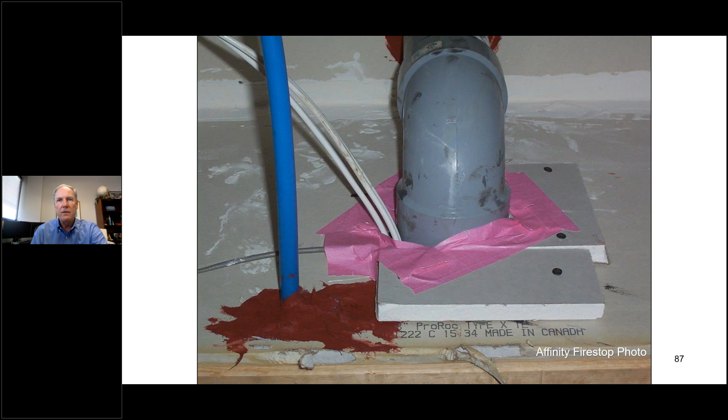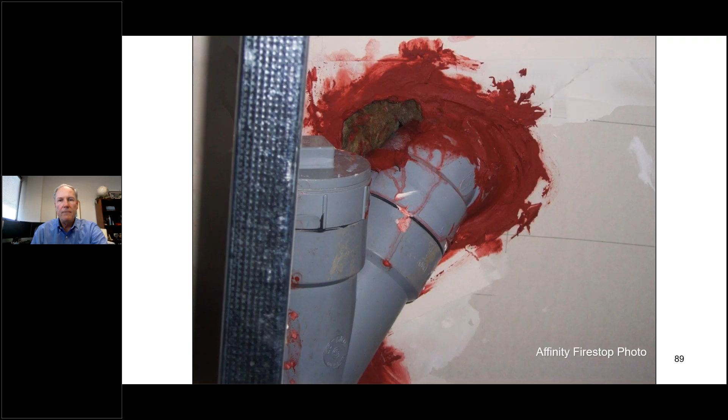Really? Come on. This is a documentation sport, a tested and listed system sport, and really deserves more respect. These manufacturers spend millions on testing, yet people buy their products and schmuck it up like that, you see. SCHMUCK is a technical term, and it's just a mess what we see in the field sometimes.

Mind you, there's a lot of companies that do it right, get it right, label it. We've got an ASTM standard going on in labeling. We're going to try to put that in the 2027 version, probably of the International Building Code, that says how you label the assembly, how far from the assembly the label should be, can it be stuck to the wall.

Is it supposed to be above the piping that you see in front of you, what's the minimum language that should be on there. There's not much uniformity in that. We're working on that standard now. Jay McGuire, one of our board members, has been passionate about it. We're working together to have that work.

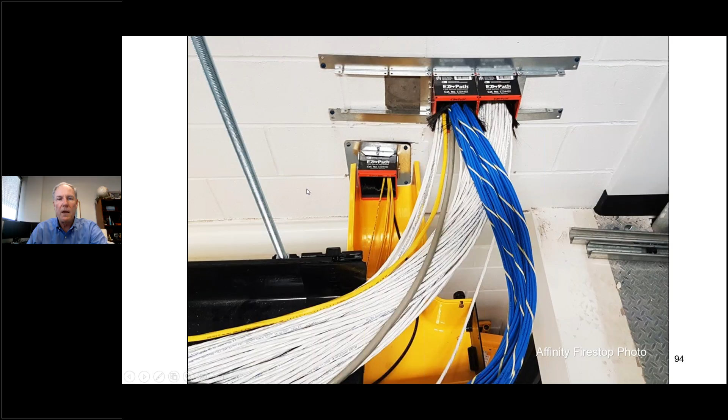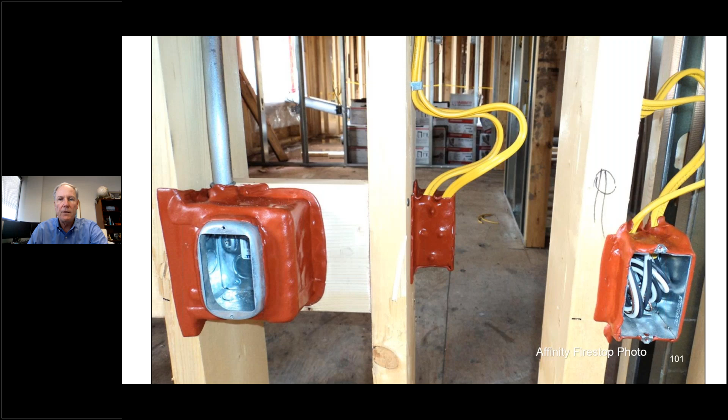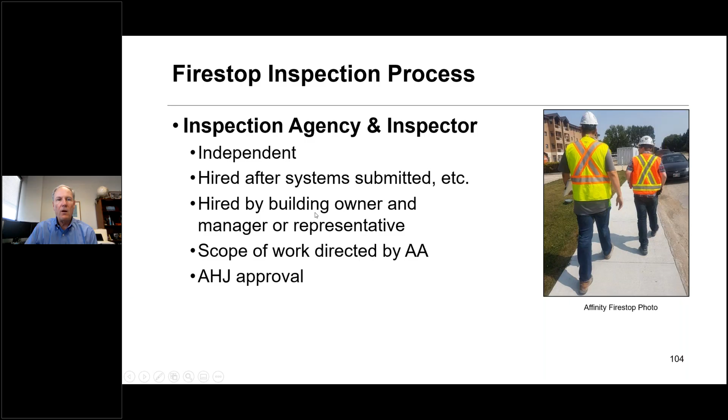But there's some good fire stopping that's taken place over the years. Good contractors, great inspection, all that make sure that fire and life safety works at the end of the day. And we hope that more and more companies get into this in the right way so that they understand the minimum requirements are for fire stop inspection agencies, for special inspection, that pre-job meetings are important, that the tested and listed systems are important.

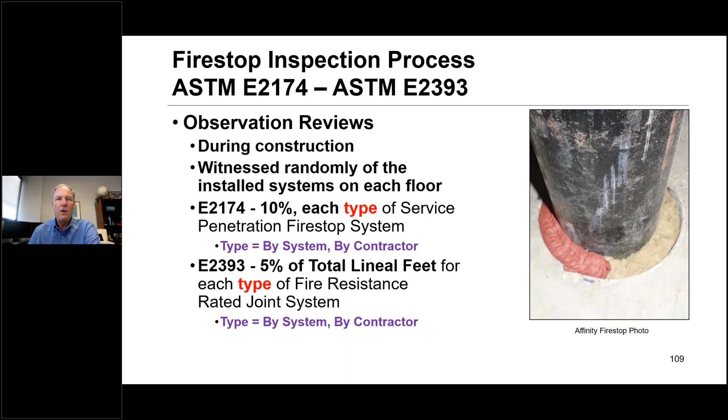Somebody's going to be watching them at the pre-construction meeting. They're going to inspect it such that they're looking at 10% of the observation of each type of penetration fire stop, no less than 1 per 10,000 square foot of floor area. And what's that type of fire stop? It's by system, by contractor, to make sure that every contractor gets inspected the same as the other contractor that's there. The electrician and the plumber should have the same percentage of theirs looked at as the fire stop contractor, so that nobody gets missed.

Destructive testing seems to be the way that things are going now. 2% of each type of penetrating item, no less than 1, no less per 10,000 square feet of floor area, and then the ASTM E2393, 1 for every 500 lineal feet, 152 lineal meters of joint area as well.

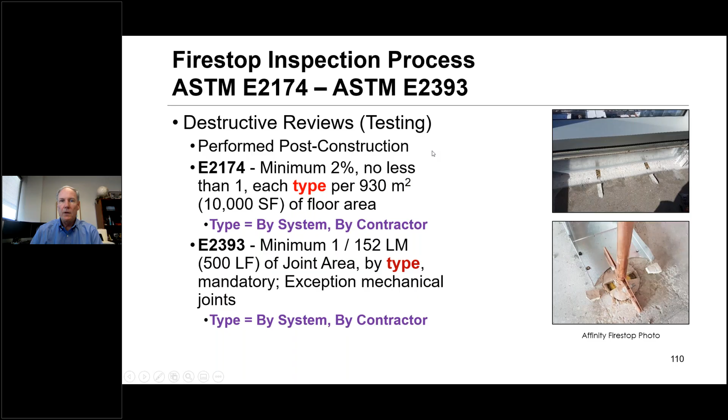Labels, we talked about that. Standard is coming, FCIA is working on it. We'll be at ASTM in October to see if we can get things moving along just fine.

One thing you should know from a contracting perspective and a building owner manager perspective is that your inspector and your contractor company are communicating with each other. If they don't communicate, and it's a fast track project where maybe the contractor loaded the project up with 60, 70 people installing fire stopping, and they're getting 1 floor done every 2.5 hours, if that fire stop inspector finds a bad process resulting in errors and doesn't communicate it for 3 days, A, they've wasted time, which delays the opening of the building, and B, that fire stop contractor spent a lot of money for nothing.

And the building owner spent a lot of money for nothing with that inspector because the communication didn't take place. The building code says that immediate notification is supposed to take place from the inspector to the contractor. Like, woo, immediate, that's now. So make sure that communication process is set up. Know that there's extra inspection if somebody messes up.

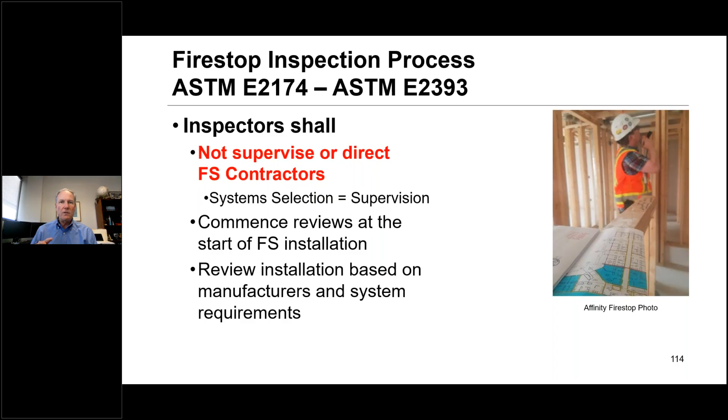The inspector shall not supervise the contractors or direct the fire stop contractor. That includes, in our opinion, FCIA's opinion, system selection. The inspector's hired to verify the contractor knows what they're doing, not to supervise them and tell them what systems to use. That's not the role of the inspection agency. The inspection agency's role is to inspect to the inspection documents. Keep that in mind as things move along.

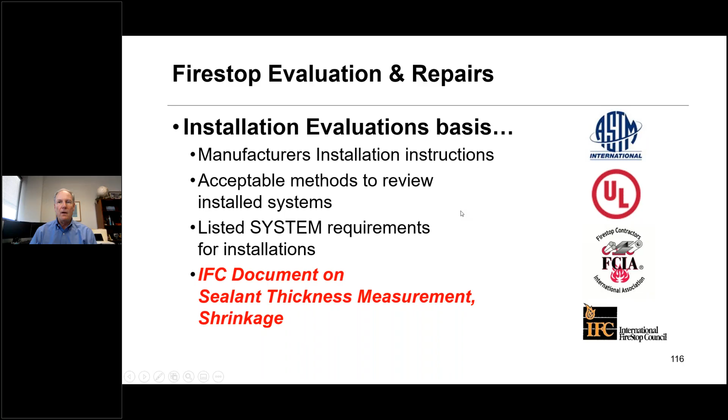Calibration, we talked about. Measuring tapes need to be calibrated. The evaluation has to be done based on the manufacturer's installation instructions, and then the repairs also have to be done to the manufacturer's installation instructions. We've noticed the last 3 years or so that the manufacturers are starting to put repair instructions on their product data sheets, and thank you to the manufacturers for doing that. It's a big deal, and it's very important because for the life cycle of the building, this material has to be in it. It has to be a fire stop system and live for the life cycle of the building.

So reports are given, and then repairs and patching is done through the life cycle. This concludes right at the end, right at 11:30, basically when we told you we'd be doing this. Finishes up what we want to talk about on barrier management, codes, standards, and the FCIA, as well as the programs. Proper design, installation, inspection, and maintaining protection is something the FCIA has had in its mission for the last 23 years.

Proper design, installation, inspection, and maintaining protection. Something to keep in your head and know that the FCIA has driven the standards to build that. We respect our manufacturers who were there before us, building the test standards, ASTM E814, UL 1479, UL 2079, that showed up before we existed as an association. And we appreciate the opportunity to participate in the standards development process to make sure that the products tested reflect what's actually going to happen in the real world. And we've been doing our best to try to input those perspectives to that standards development process.

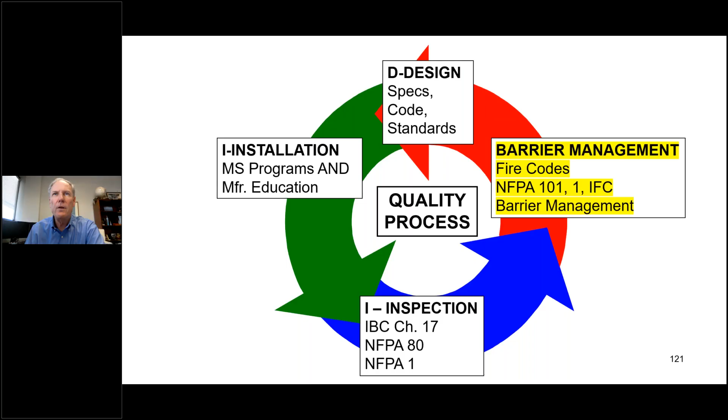So at this point, I see there's some questions that came up. I didn't see a lot of them come up, but let's go ahead and start answering them. So Rich, if you want to turn on your microphone and camera there, then we can kind of tag team this and off we'll go. If it goes the way it normally goes, the questions will start coming in once we stop talking.

So the first one is, why is an L rating an L and not an S? You get the LW, you got the W rating for water, you got the F for fire, you got the T for temperature, we got an L for smoke. Really? Any idea there, Rich?

Oh yes, I'm very well aware of that. That was probably my decision back when I was working for UL. When we started working on the methodology for smoke leakage, it was a direct result of some provisions in the NFPA 101 Life Safety Code about passages of smoke. And we thought if we used the S for smoke in that rating terminology, it would bring up questions on the code front when we went for code adoption - questions about what is in the smoke, how many parts per million, how toxic is it, all sorts of questions none of us were prepared to answer.

So we thought by using the phrase air leakage, we could avoid those sort of questions. Well, that didn't turn out to be the case. It still took about 13 years from publication of the requirements in the standard till the 2006 IBC, which first adopted requirements limiting the passage of smoke on a quantifiable basis. But anyway, it was an attempt to avoid those sort of questions and get quicker code adoption, but it was a futile effort in the end.

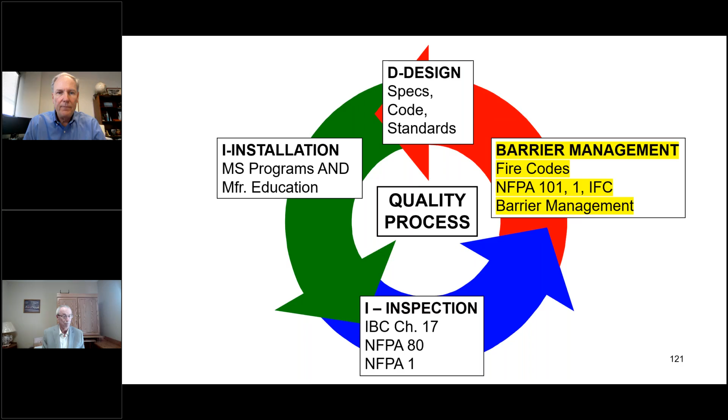Understood. But just think of the leakage in reality meaning smoke. Air leakage simulating smoke. Good idea.

Other questions? I'll mention Rich and I have been doing a series on the ancillary standards that are over at ASTM.

Exposure, movement, et cetera. I mean, that movement standard is relatively new. In 2008, the FCIA wrote a letter to the International Firestop Council and said, look, the penetration items are going to move because they're hanging from a ceiling above that might have carts moving over the top of it for hospitals, file cabinets in office buildings. We're going to get some movement here. We don't want something to measure the movement of somebody jumping up and down on the pipe while they're putting sealant on at the fire barrier. We want something reasonable, that catches water hammer and the light movement that might be expected. That's where that came up.

And frankly, 2008 is when we wrote the first letter. We had discussions at ASTM with our manufacturer partners, and it really isn't showing up in the general public, if you will. I saw some of the manufacturers have started webinars, as has the FCIA. We did one, Rich did one for us early in the year. That didn't really show up until probably a year ago or so. As Rich said, by the time the L rating was developed, before it got into the code was 12, 13 years. The code and standards development process, from the time the audience — contractors, inspectors, architects, building owners — say, how come you guys don't do this? Well, okay fine, we'll form a committee and get it started. It can take 10 years to come up with the solution, sometimes more.